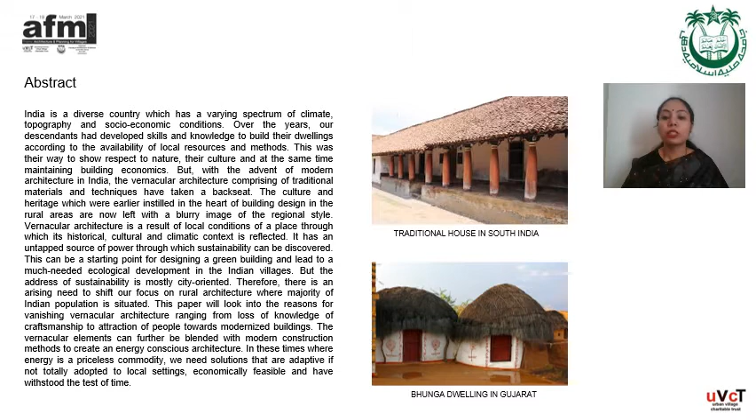The term vernacular in literal terms mean local or native. It can be described as a built setting that is based upon the local needs of the people. Due to varied geographical conditions in India, we have a variety of vernacular styles available here. This we will discuss in the upcoming slides.

According to the Census of India in 2011, a total of 68.84% population lives in the rural area. The houses of the rural poor are found to be lacking in several ways, mostly because of lack of proper planning, sanitation, and inability to withstand the natural calamities. In such areas, sustainable designs can play a vital role to improve the situation.

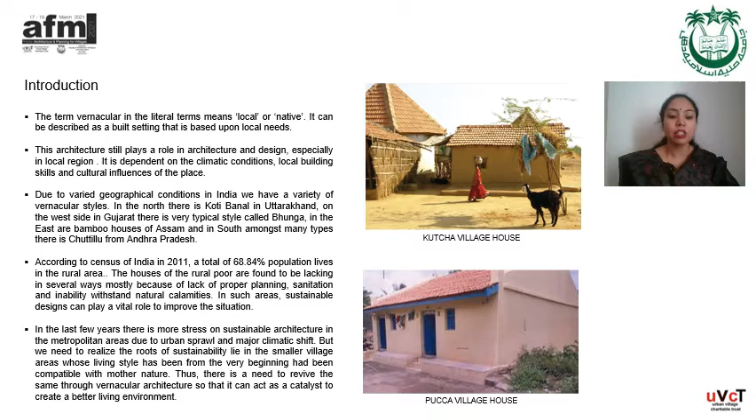In the past few years, there has been more stress on sustainable architecture in the metropolitan areas due to urban sprawl and major climatic shift. But we need to realize that the roots of sustainability lie in the smaller village areas whose living styles from the very beginning have been compatible with Mother Nature. Thus, there is a need to revive the same through vernacular architecture so that it can act as a catalyst to create a better living environment.

Now, let us look at some climate responsive vernacular elements. India can be broadly divided into six climatic zones: hot and dry, warm and humid, composite, moderate, cold and cloudy, and cold and dry. The hot and dry climate exists in western and central India in places such as Jodhpur, Jaisalmer, and certain cities of Gujarat. The Pakka architecture is dominated by the Haveli type of buildings. They are mostly 2 to 3 stories high, consisting of thick walls and have a central courtyard.

The courtyard not only acts as a place for social gathering, but it is the main source of light and ventilation in the Haveli. All the construction is done with locally available stones and with local craftsmen, which makes it very cost effective. On the other hand, the Kacha built structures for this climate type can be found in the villages of Kutch in Gujarat, and they are known as Bhunga.

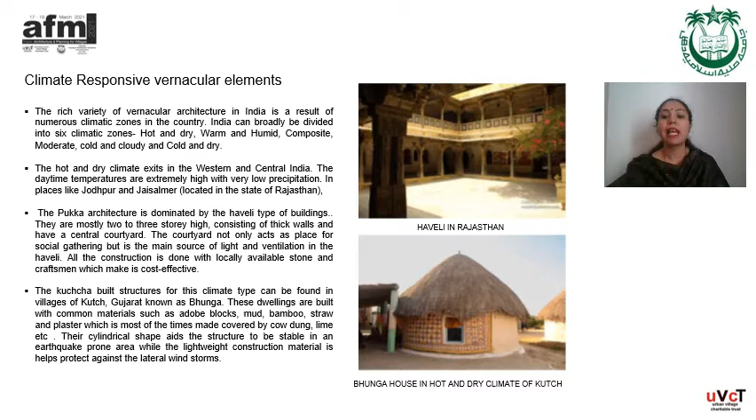These dwellings are made with common materials such as adobe blocks, mud, bamboo, straw, and plaster, which is most of the times covered by cow dung and lime, etc. Their cylindrical shape aids the structure to be stable in an earthquake-prone area, while the lightweight construction materials helps to protect against the lateral storm and winds.

The coastal areas of southern India have warm and humid climate. Nalukettu and Ettukettu are some traditional dwellings that can be seen in the state of Kerala. They have a courtyard in the center of the house. The orientation is southwest to prevent severe sun rays from entering, and the roof is made sloping because of the high rainfall which can be seen in the area. The local materials such as laterite, timber, bamboo, clay tiles, along with thatch and coconut leaves are used for construction.

The composite climate mostly covers the central part of India. Some of the cities in states like New Delhi, Jharkhand, Uttar Pradesh, the architecture is responsive to such weather conditions.

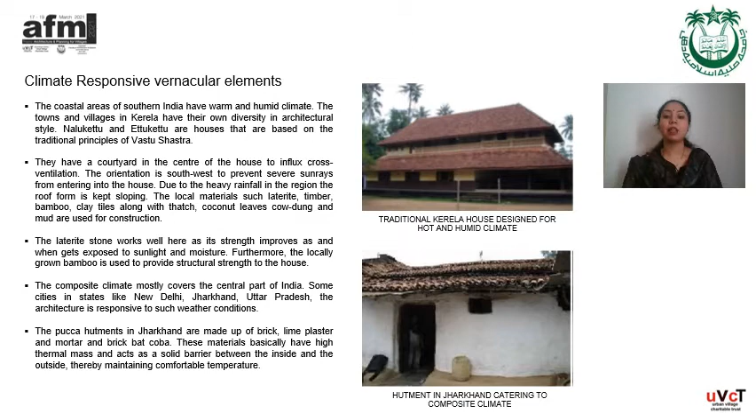For example, the Pakka hutments in Jharkhand are made up of brick, lime plaster, mortar, and brickbat koba. These materials have high thermal mass and act as a solid barrier between the inside and the outside, thereby maintaining comfortable temperature. The city of Bangalore is an apt example for the moderate climate.

Here, the orientation of the buildings, the correct placement of windows, and the use of courtyard play an important role in good designing. The use of local materials such as lime concrete for flooring, stone masonry and lime mortar for walls, and Mangalore tiles for roofing reduces the building costs.

In the northern states of India, where there is high altitude, cold and cloudy climate is experienced, and precipitation can be in the form of rain and snow. These areas are also prone to mild earthquakes and landslides, so local craftsmen consider this while designing the building.

For example, in the Kathkuni architecture of Himachal Pradesh, the alternate courses of houses are made with dry stone masonry and wood without cement mortar. This layering and interlocking of timber and stone provides firmness to the structure, and because these walls are heavy, they provide good thermal insulation.

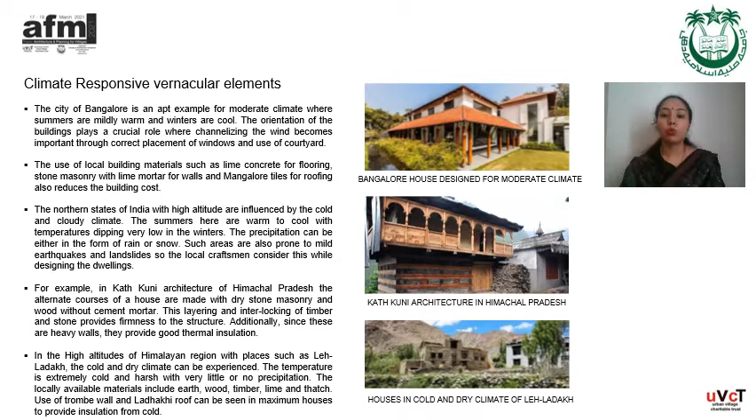In places such as Leh and Ladakh, cold and dry climate is experienced, and the locally available materials include earth, wood, timber, lime, and thatch. The use of trombe walls and Ladakhi roofs can be seen in most houses to provide insulation from cold.

Now let us move on to the existing situation in the Indian villages. As we discussed earlier, poor housing is one of the major problems our country is still facing today because of the low economic status of the people living here.

In the past couple of decades, the building typology here has seen a shift from traditional form to a more modern or hybrid form because of the easy availability of modern materials and the change of lifestyle of the people. These structures are more energy demanding than their ancestral vernacular forms.

So, in the current scenario, Indian vernacular architecture can be largely classified into three types: first is Kacha, second is Pakka, and the third is semi-Pakka.

The Kacha structure has a short lifespan as it is made from natural materials and requires constant care and frequent replacements. Its construction is the most economical out of the three categories, and it is also very easy to construct because the labor is easily available in the rural setup.

The Pakka structure, on the other hand, is built out of materials which are more solid and resistant to wear and tear, including concrete, bricks, cement, etc. The permanency of such dwellings is a major advantage as it is easier for the user to adjust inside, and it provides better protection from damage caused by natural disasters.

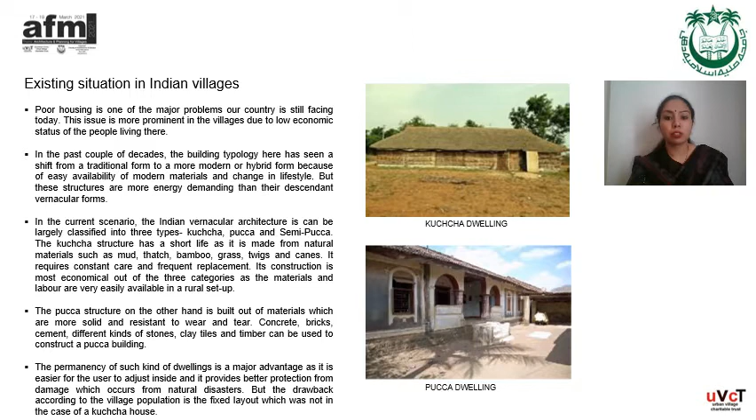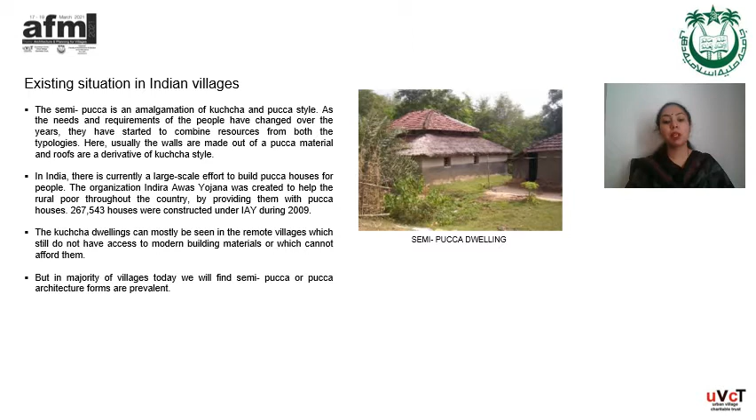The semi-Pakka architecture is basically a mix of Kacha and Pakka styles. Here, the walls are usually made out of Pakka material and the roofs are a derivative of Kacha style. Kacha style dwellings can be mostly seen in remote villages which still do not have access to modern building materials or cannot afford them. But in the majority of villages today, we find semi-Pakka or Pakka architecture forms that are prevalent.

Now let us discuss the reasons for the loss of vernacular architecture in India. There is a belief that the process of globalization and urbanization in the world has a negative impact on preserving traditional architectural heritage. Also, the reduction of rural population due to migration of people to the city in search of a better lifestyle has made many craftsmen shift their base.

And earlier, the architecture and art, which was being passed on from one generation to another, has now come to a halt. Also, the fundamental changes in the lifestyle in villages has caused the disappearance of traditional architecture.

Today, we rely too much on artificial cooling and heating, and instead of using these passive systems, we are being too reliant on artificial cooling. This is also a major cause of the rise in greenhouse effect and hence global warming.

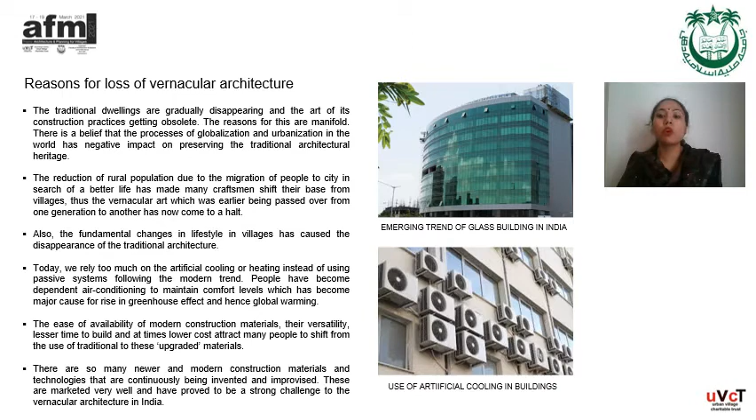The ease of availability of modern construction materials and their versatility, the lesser time they take to build, and at times lower cost attract many people to shift their usage from traditional to these upgraded materials. There are also new and modern construction technologies coming up and being invented. These are all marketed so well that they have proved to be a strong competitor to vernacular architecture in India.

Industrialization has further led to mass production of building elements, which has given rise to more standardized structures.

These elements have a much larger carbon footprint, which is a growing threat to our environment. So there are numerous examples where we can see that vernacular architecture is slowly vanishing.

One such example is of the Khasi tribes in Meghalaya, who used to build bamboo bridges over the rivers. But these bridges were not sturdy against the power of the river, so they modified their own vernacular technique and instead of bamboo, they used rubber trees to build the bridges.

However, even this practice is now dying down slowly, because with the use of modern materials such as steel and concrete, the same bridges can be constructed in a small fraction of time. Like this, there are many other examples where traditional materials and techniques are being replaced by contemporary or modern elements.

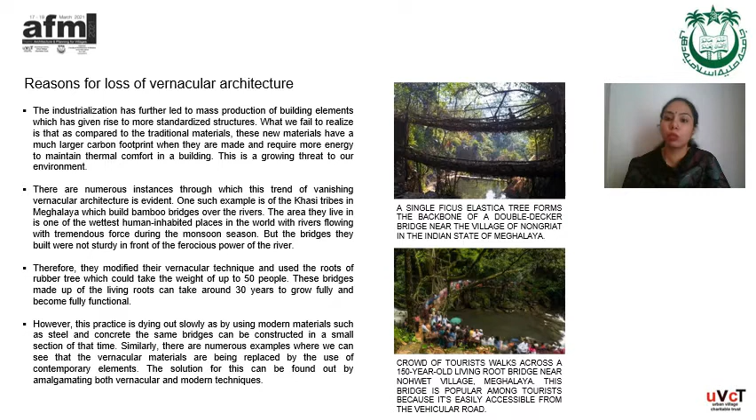So the solution for this can be found by amalgamating both vernacular and modern techniques. Amalgamation of vernacular elements in modern architecture, with rapid technological advancements and urbanization, incorporating knowledge of vernacular construction, has proved to be a step forward in terms of sustainable architecture.

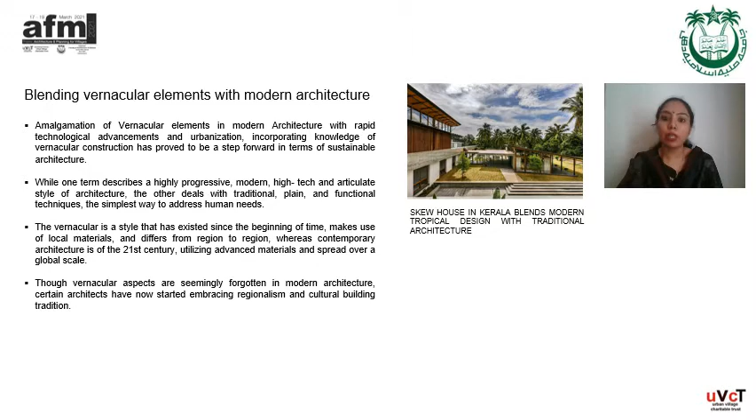While one term describes a highly progressive, modern, high-tech and articulate style of architecture, the other deals with the traditional, plain and functional techniques, the simplest way to address human needs. So in the next slide, we'll look at a few examples where there has been a mix of modern and vernacular styles to give rise to a new, more sustainable style of architecture.

The first example we see here is the Cape House, which is in Surat. As you can see in the image, the house is very modern in its look, but the materials used here are extremely eco-friendly, and brick has been used extensively to make it more cost-effective.

The second example is the Oland Estate in Tamil Nadu. It is basically a bungalow made in mud and with locally available stone. The steep slanting roof not only protects the structure from climatic and rainfall conditions, but also gives the home an idiosyncratic identity. The third example is the Asha Niketan in Kolkata.

It is built with traditional bamboo and mud huts. The vernacular style is followed by using local materials such as exposed bricks for walls, terracotta tile roofs, and large windows with bamboo mesh, which is locally known as dharma.

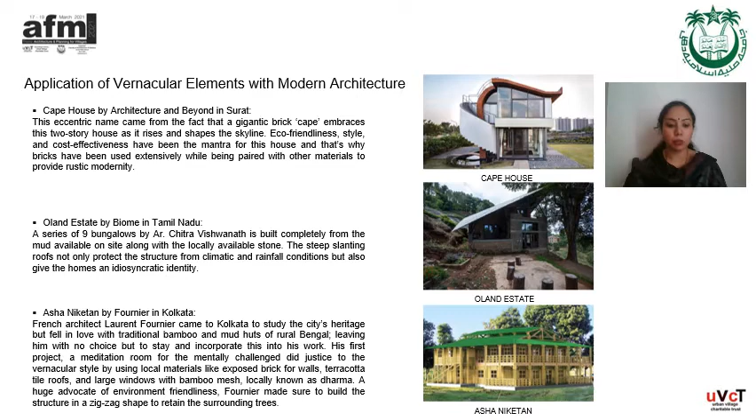The next example is the Brick House, which is in Mumbai. It is a farmhouse set in a rural area, made up of wood, stone, bricks, and bamboo. The use of eco-friendly technologies such as rat trap bonds, brick jalis, and built-in furniture are not only economical but also give an earthy feel to the space.

The next example is the Kripacharya Farmhouse in Pune. From Chira, a local red laterite stone, to Kund, a traditional central open space, to large verandas, this house is a manifestation of many vernacular elements. As for modern materials, glass is used for direct daylight, and double-layered terracotta roofing is done for insulation. So you can see it is a beautiful mix of modern and vernacular techniques and materials.

And lastly, the Pearl Academy of Fashion, which is in Jaipur. In this institute, several elements are used to create an environmentally conscious passive habitat, and it uses techniques such as step wells, a traditional way of cooling, along with jalis to keep light and ventilation in flow.

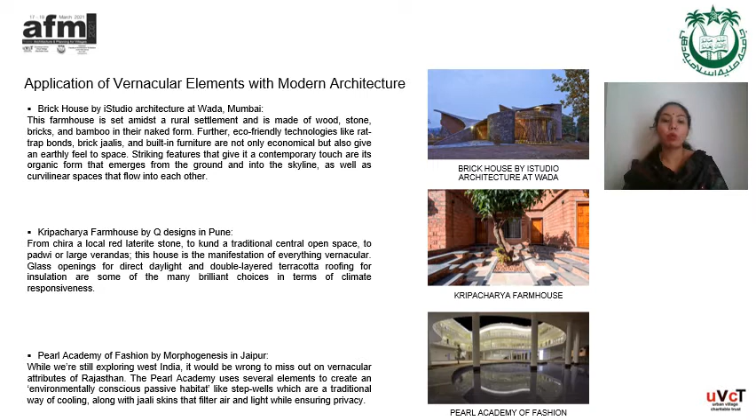To conclude, I would just like to say that to keep up with current times and technological advancements, we should not forget our traditional building knowledge and indigenous techniques. Since sustainability is a burning topic amongst us, villages need to revive their time-tested art of building to inculcate the same. There is a necessity to integrate rural planning and sustainable development to create a better living environment for the population.

We have seen with the examples discussed in this paper that certain design approaches can be merged together with modern construction techniques in order to create an ecologically sound built environment which is also commercially viable. As design professionals, we should plan the future with greater awareness, having an approach towards green building design. Indian vernacular architecture is one of the most spectacular styles in the world, and we should respect it by integrating the existing fabric of artificial and natural environment as aptly as possible.